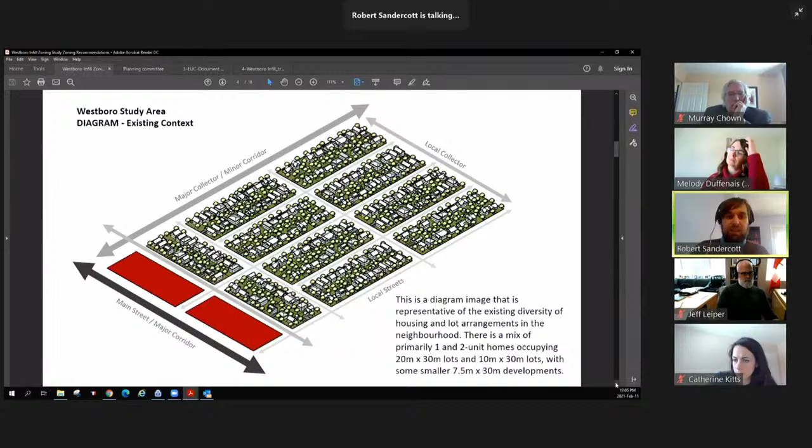So here we see a rough representation of the existing context in the study area. It is a mix of detached and mainly semi-detached homes, also with some multi-unit mixed in there.

Here is where we see what the current zoning permits. Most of this area is one zone, R3R, regardless of whether it's a more local tucked away street in the interior or an edge such as Byron Avenue or Churchill Avenue or any sort of major street. There is no regard for local context or how significant the street is. When we look at the permissions for triplexes, the R3R zone essentially permits a 3-story box up to a density of about 80 units per hectare, somewhere between 20 and 80 units per hectare overall, but generally in terms of the actual form, a 3-story box, regardless of where you are.

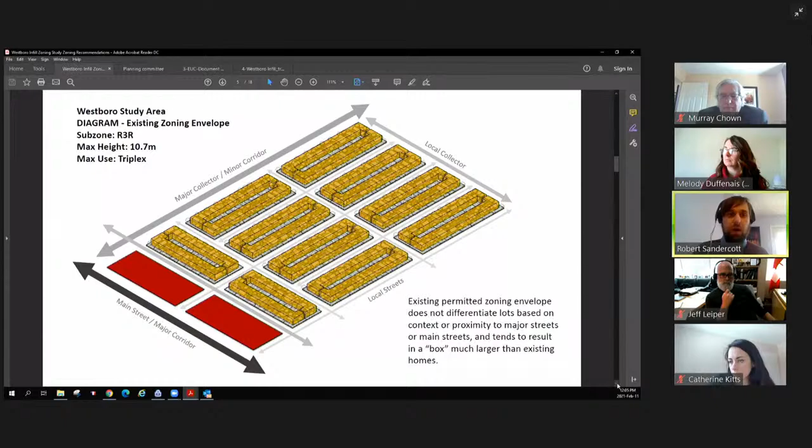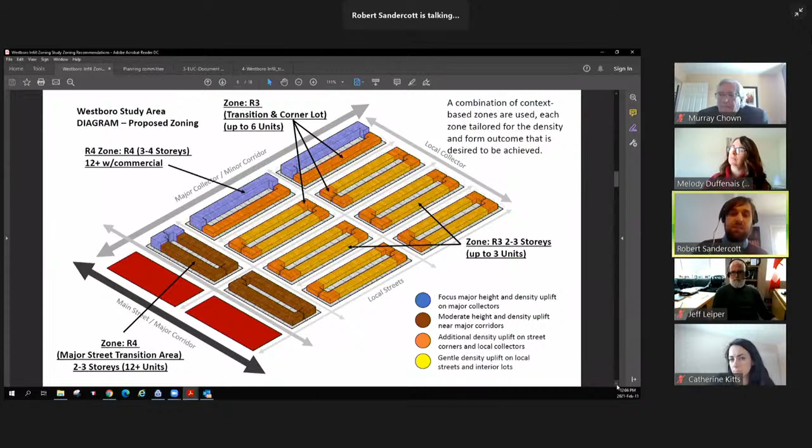So what we essentially saw was necessary is something similar to the current proposal, directing higher density to major corridors and edges near and around major main streets. In this case, Churchill Avenue and Byron Avenue are the main edges and major streets within the study area. On local streets, density will still be permitted up to anywhere from 35 to 100 units per hectare, still permitting triplexes, permitting townhouses, but with a much more controlled built form that actually addresses existing context, character, and building massing. So not necessarily the 3-story box anymore.

So the result, as we see here, as more develops, is more certainty as development proceeds. The biggest density uplift goes towards the major streets and the areas towards the edge of the neighborhood on Byron. There will still be change as you go on local streets, but it will be a much more gradual change, and you will still be able to recognize those important characteristics of the neighborhood, even as new development comes in. There is a compatibility there.

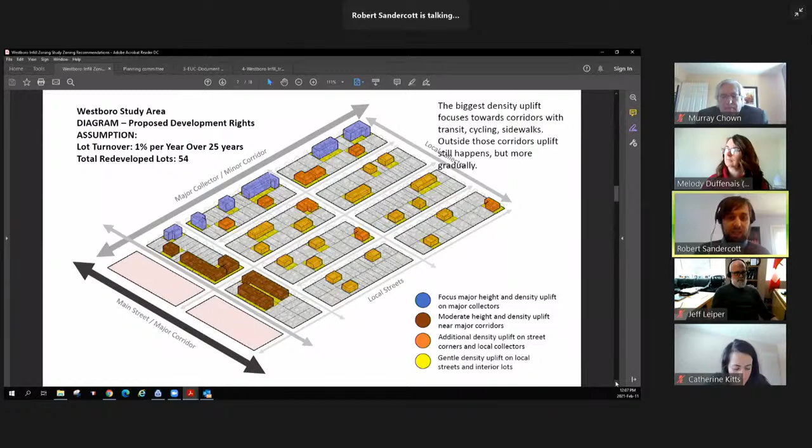So the result is an increase in both housing quantity, types of housing, and housing diversity in a manner that is overall more respectful of the existing context in the neighborhood.

So essentially, this amendment divides this whole study area into 4 areas. The first 2 being the most major streets, Churchill and Byron. Area C then being corner lots on local streets, as well as what we refer to as transition areas - essentially areas not quite on the major street, but next to it. And then finally, local streets in the interior.

So this is how that would be represented on a map. The blue and the red, being Churchill and Byron respectively, are the areas where the highest density would be concentrated, transitioning to some density on the orange, transitioning to the lowest level of permitted density in the yellow, the local streets.

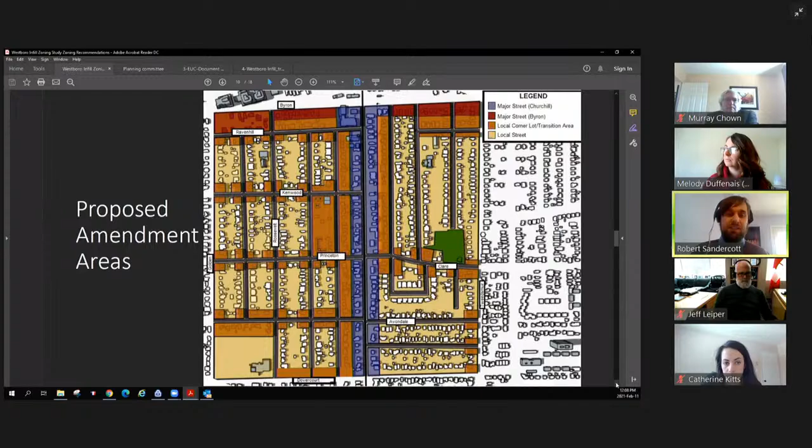In zoning terms, that essentially means an R4 zone on both Churchill and Byron Avenue, permitting uses such as apartment buildings, up to 4 stories on Churchill, 3 stories on Byron. In addition, no new single detached or semi-detached would be permitted on Churchill, to ensure that when lots are redeveloped, they actually result in higher density, given that that's where we're intending to concentrate it. Up to 6 units are permitted on corner lots and transition areas, and on local streets again, permitting triplexes, permitting townhouses, no greater than that in terms of density.

So we have a proposal for a greater range of housing in Westboro, but how do we ensure that it's compatible? Here's where we propose a number of measures.

Height: local context is key. As we said, 3 to 4 stories is appropriate on those more significant streets, but when we look at the local streets in the neighborhood, they're more comprised of single homes, generally with pitched roofs, as you would picture your typical home. With that in mind, it's proposed to limit height on local streets based on the type of roof. Pitched roofs are generally more indicative of the existing streetscape in a lot of Westboro, so a 2.5-story height is permitted for flat roofs, which may be increased to 3 stories, 10 meters, where a pitched roof is used, which fits in more with that style. The thing to keep in mind on local streets is that this is a lower height than the 11-meter height that's presently permitted for triplexes in the present R3R.

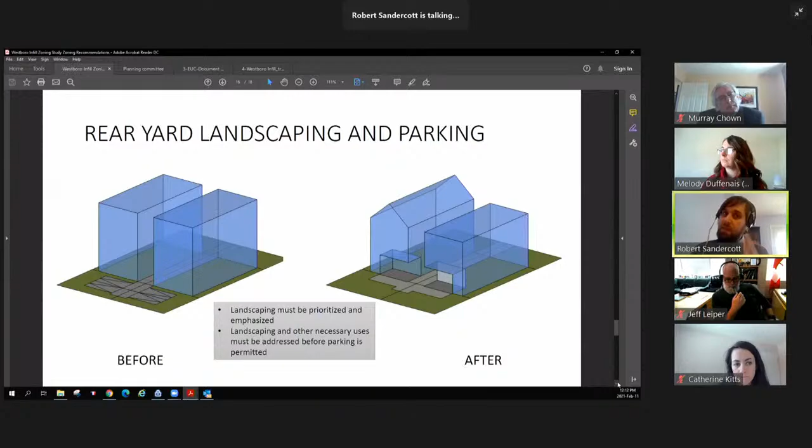A quick note on other yards: front yards and side yards will be standardized in each area to ensure one set of standards regardless of dwelling type. Where larger buildings are permitted, on Churchill and Byron, that would be a 4.5 meter setback. On local streets, that's a 6 meter setback, which is what you see in the R3R zone today. Similarly, side yards are proposed to be standardized to 1.5 meters, typical for where apartment buildings are permitted—a slight increase for some lower density dwelling types that currently allow a 1.2 meter setback. The idea is to standardize based on form, less so on use.

To put it all together, these regulations are intended to set a clear direction for where growth in Westboro is to be concentrated, the built form and design considerations we want to see in support of infill, how to address context in terms of height, landscaping, and other important characteristics, and the key principles we'd like to see inform future zoning in urban neighborhoods as we continue developing the new official plan and subsequently the new comprehensive zoning bylaw. Thank you very much, Madam Chair.

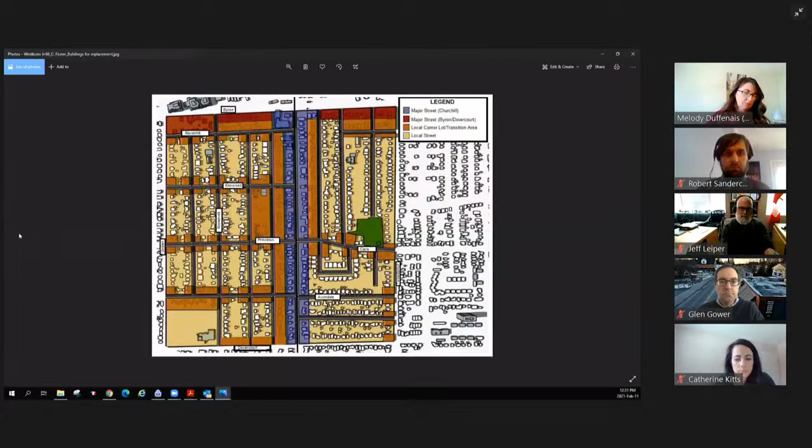So what I would say is, in summary, that this proposal violates the rights of owners, it damages the community, it forces people to move, it consists effectively of a bulldoze, replace, push out the people and bring in new buildings. And it's incompatible with the duty of councillors under the Municipal Act. It's incompatible with the provisions in which properties were granted initially by the province and then the conveyance through the deed. The community rejects it.

And I ask you as members of council to reject this proposal. Thank you. Thank you, Mr. Fichtner. I'm not seeing any hands up from committee members. Thank you for your presentation.

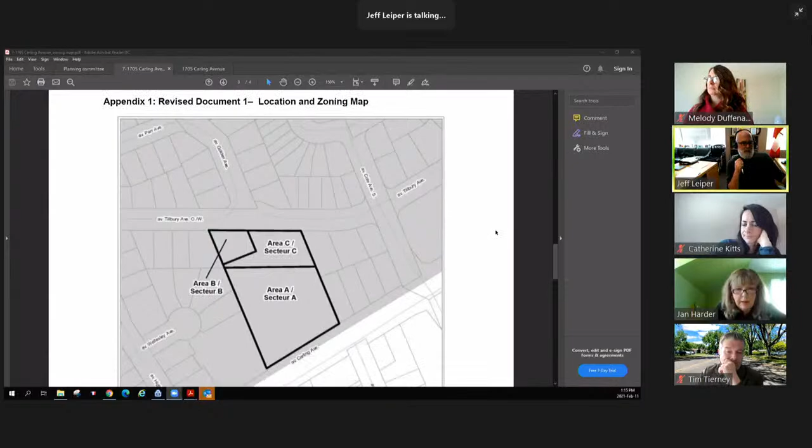And I do just want to thank the planner for creating some shrink-wrapped zoning so that residents have the assurance that this won't be developed to any greater density than what they are actually proposing to us. Thank you very much to Claridge for that.

Thank you. And John Bernier is your planner. Yeah, hi, thank you, John, for your work on that. That's been a lot of discussion over the past couple of weeks. Okay, well, I know how much work you've done on this too, Councillor Leiper, because we've had more than one conversation, if not 2 or 3.

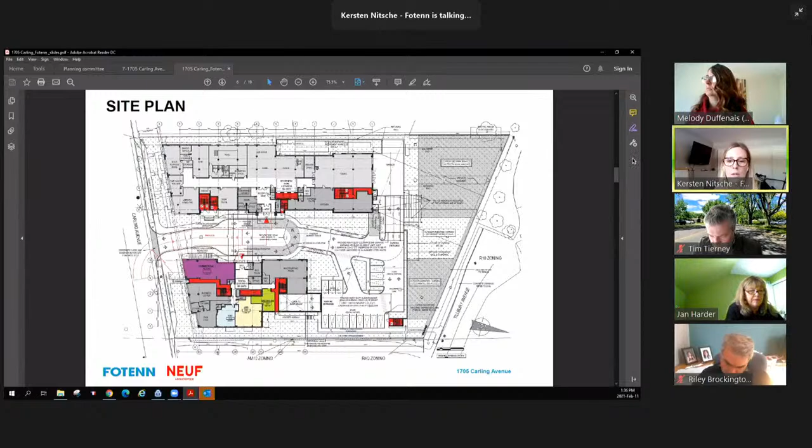As per Schedule D of the official plan, there is a planned rapid station to the east at Carling and Clyde, about 100 meters walking distance. Further to that proximity, when considering greater heights, we must consider community amenity being provided, as well as appropriate transition to neighborhoods. So through this application, the ownership team has worked with Councillor Leiper and city staff to determine a community amenity, which will be provided as part and parcel of the site plan control application approval.

Through this, we've also examined the site in context and determined that, in our opinion, there is appropriate transition provided. On the site plan, the building on top is the west building, the 9-story retirement home that's proposed. The closest point to the rear lot line is 35 meters, and then we have Tilbury Avenue, another 20-meter wide right-of-way. So considering transition, we're looking at 55 meters away from the closest residential dwelling property line.

For the proposed 22-story residential tower on the east of the property, that increases to approximately 45 meters to the rear property line, so about 65 meters from the rear transition. When considering appropriate transition, we looked at this and feel it is appropriate. There's sufficient space and distance to provide that transition from the front of Carling, along the frontage, all the way to the residential development to the rear. In summary, we believe this is appropriate and meets the official plan policies for higher heights on an arterial main street. We welcome any questions.

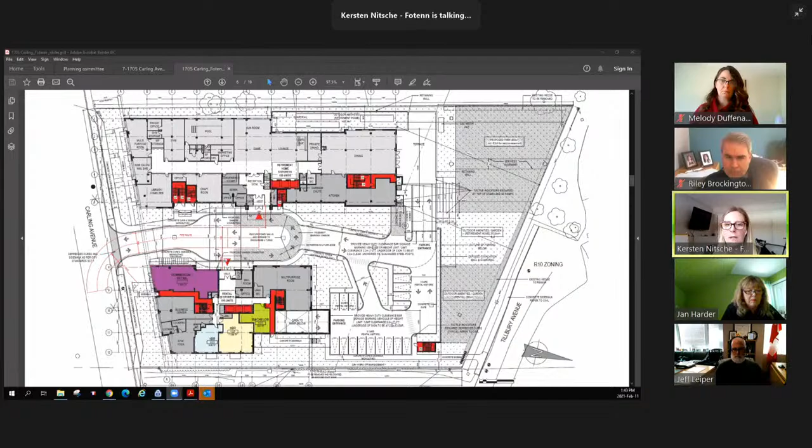I think this has been an ongoing conversation, and we understand the importance of that. I would invite either Vincent or Neil to make that commitment, but looking at the latest landscape plan, which is still just being finalized as we speak, it does show that existing hedge as being maintained. So for those who don't know, Tilbury comes in from Churchill, you'll see that Tilbury stops, and then there's a footpath.

There's a footpath that goes to where Tilbury continues, so traffic can't go through there. So the length of that section before the break would be hedged, and the folks who live on the north side of Tilbury facing the development would still be looking at hedge.

There was a question of privacy fence along the east and west corners. When we get to site plan, I'm looking for a commitment that privacy fence would be put in. Is that something you can commit to?

Yeah, through you, Madam Chair. We've actually amended the landscape plan today to include the fencing on the west side that was requested, but if the east side is being requested as well, we're amenable to that. And the hedge as well, we're going to do whatever we can to preserve that section and protect it and maintain it in perpetuity. If we have to get an arborist or something engaged to do that, we're willing to do so.

Okay. The site plan, so the zoning schedule, I believe, misses a little bit of an indent on the west side setback from the property line. So by council, I may ask for some language in the report that sets out that little bit extra there.

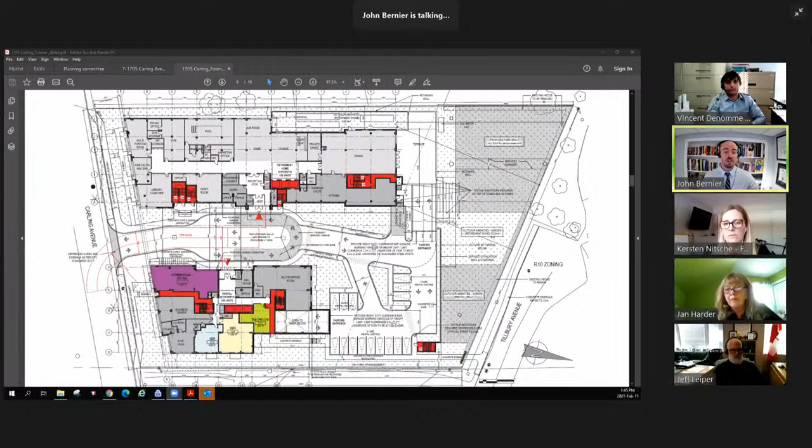I see Mr. Bernier was thinking of jumping in on that. Yeah, so this will be a condition through site plan, and the radius for these types of surveys is 75 meters. Perfect. So that's going to capture virtually everything that is on that list then.

And then one other question for you is with respect to the surface parking. Through the course of site plan, do you foresee that there might be an opportunity to make that more optimal so that people have easy access to the retirement home, to visiting the folks who are in the tower, so that they are not tempted to park on side streets around?

We've looked at this in a million different ways, and the plans have changed in a million different ways, and this is the best design that we've come up with. We'll keep looking at it, and maybe we can look at reallocating the visitor spots to some for the retirement home, but I don't see the layout changing.

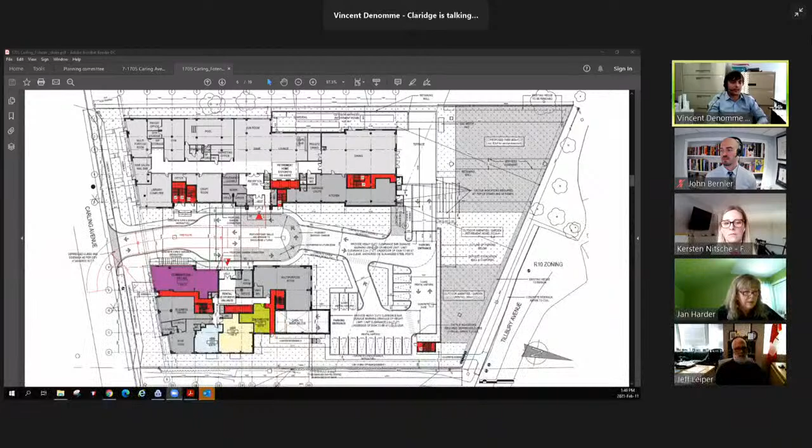It's what you don't see on the plan - all the infrastructure, the fire routes that you need, the amenity spaces that you need, the soft landscaping. So all these things kind of dictate this design.

Okay. And then I know this site plan is relatively new, but I'll be asking John by the time we get to a vote on this at council to make sure that this most recent site plan is the one that accompanies the materials that the developer is beholden to it.

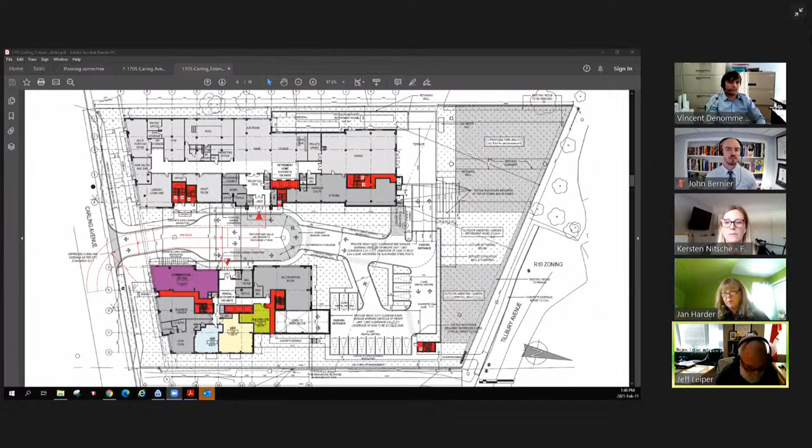I'll keep it brief. I am supportive of this tower. When you take a look at the buffer that is possible with including a new park before you get to the rear wall of either of these structures, it is a very significant buffer. This is not untypical of what you'll see up and down Carling Avenue. Some of the height here is justified because of the proximity to a transportation corridor like Carling Avenue, and some of the application materials speak to the eventual surface rail that will go down Carling.

I am not naive. I don't believe that surface rail is going to be on Carling anytime soon. We have a lot of other light rail things that we need to do first. But I do believe that a lot of the folks who move into this building are going to have excellent access to buses, and I also believe that OC Transpo will have a relatively easy time boosting bus service on a justifiable basis if they need to.

All of Carling Avenue is getting more and more developed. We have bus priority lanes that are going to be going in. So I think this kind of density is justified on Carling with a very large number of people able to take advantage of public transit in order to be able to get to the LRT a little further down Carling Avenue.

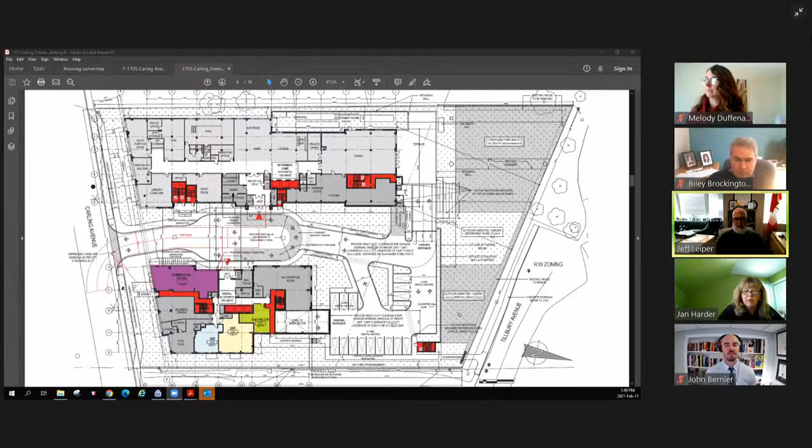For those who are cyclists as well, they are able to get out of the building. They'll be able to exit through the park, get onto low speed streets and take advantage of some of the great cycling infrastructure we have on Churchill. So I think this is an appropriate density for a main arterial road like Carling Avenue, and it's not atypical of what we see on Carling Avenue in other areas that are proximate to R1 homes.